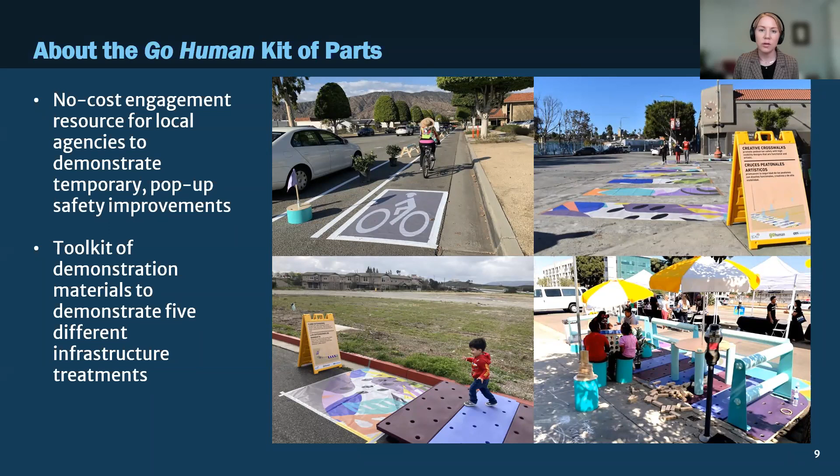Our kit of parts is really interesting because the materials are very lightweight. They're easy to transport and set up, less burdensome than traditional materials can sometimes be, and they're flexible and movable. So if you want to make a change in the field, you can easily move the materials around depending on what the site conditions are.

An important framing to all of our work through the Go Human program is our agency's commitment to racial equity. Our agency adopted a resolution restating our commitment to racial and social equity, and this aligns really closely with our Go Human project.

As you can see on the slides, fatalities and serious injuries are disproportionately occurring in historically disinvested communities, so there's an urgent need to address these issues on the ground. Demonstration projects can help facilitate this work and move forward safety priorities, especially in communities bearing the burden of these disproportionate impacts.

Now I'm excited to share some demonstrations in action. Go Human recently partnered with the City of Long Beach, their Public Works Division, and Council District 9 to demonstrate some improvements as part of their upcoming Great Boulevard project, a permanent project they plan to construct next year. We were excited to partner with this community, and this work was special because we were able to do some hyper local engagement with residents in an underserved community.

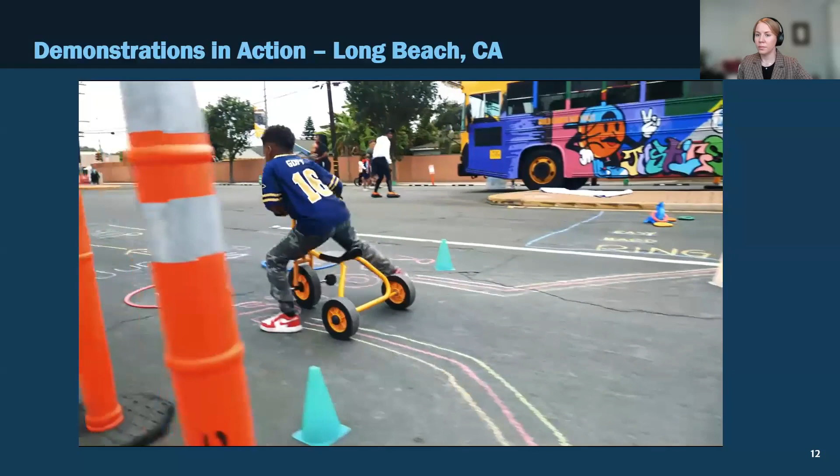We are closing down the street and reimagining Artesia Boulevard, inviting the community to come out, reimagine, and re-engage with the Artesia Boulevard corridor. Today wouldn't be possible without the Southern California Association of Governments' Go Human campaign. It's a demonstration that features safety improvements relative to mobility and livability, making sure our streets are better. Next year, you're going to see a tremendous transformation of this regional corridor. This is an exciting collaboration with the City of Long Beach, and it's about community engagement and community education, whether we're talking about the bike lanes here or the high visibility crosswalk. We want to contribute to safer streets, and that's exactly what the Go Human campaign is about. These improvements make it safer and more enjoyable to walk, bike, and roll in communities across Southern California. Activate Artesia is a great example of Go Human's mission to reduce traffic collisions in Southern California, create safer and healthier communities, and encourage people to walk and bike more.

All right, so that'll give you a little taste of what some of the demonstration projects look like. Again, it's really about celebrating the local community and engaging folks in some of the treatments they could potentially see on their roadways.

Now I want to transition a little bit to talking about some of the projects that were recently implemented as a result of Go Human demonstration projects. We partnered with the city of Palm Desert.

They're a mid-size community in the Coachella Valley where we did a demonstration project a few years ago. As a result of some really positive community feedback, the city then began taking a look at the final designs and some of the configurations of San Pablo, which is really a main thoroughfare within the community.

It has connections to the Coachella Valley Link, or CV Link bikeway, so it's really a main roadway that has residential access to commercial. We were really excited that the city then invested about 18 million dollars in improvements for San Pablo Avenue.

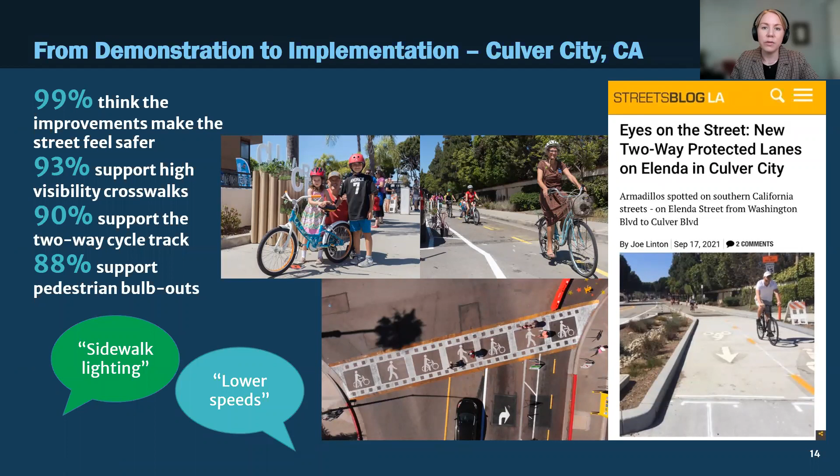We're really excited that this project is anticipated to be fully implemented this month. As you can see, there was some media coverage on it recently. We're excited that it will also include some median refuge islands and new street trees.

I'm also really excited to feature the city of Riverside. We've partnered with the city on a few demonstration projects to really help move the needle on active transportation in Riverside.

We partnered on two demonstration projects in the last few years that received overwhelmingly positive support from the community. We demonstrated treatments such as high visibility crosswalks and increased pedestrian lighting.

As a result of this support, the city actually moved forward with underpass lighting under the 91 freeway, branding it to thank some of the frontline workers during the height of COVID-19. The Go Human demonstrations also inspired other local engagements and activations in the city, as they're working towards their public health and equity goals.

You can also see they implemented some high visibility crosswalks at one of the major intersections in the city.

From these projects and many of the other projects we've worked on through Go Human, there have been many key lessons learned, and I'll share a few of them with you today.

One of the really key lessons learned is to put people at the center of the project. While demonstrations are a great tool for community engagement and a way to celebrate the local community, it's essential for public agencies to be transparent with community members about what the permanent improvements will look like and what the project timelines are. It's also critically important to continue to engage with community members and follow up with them throughout all phases of the project.

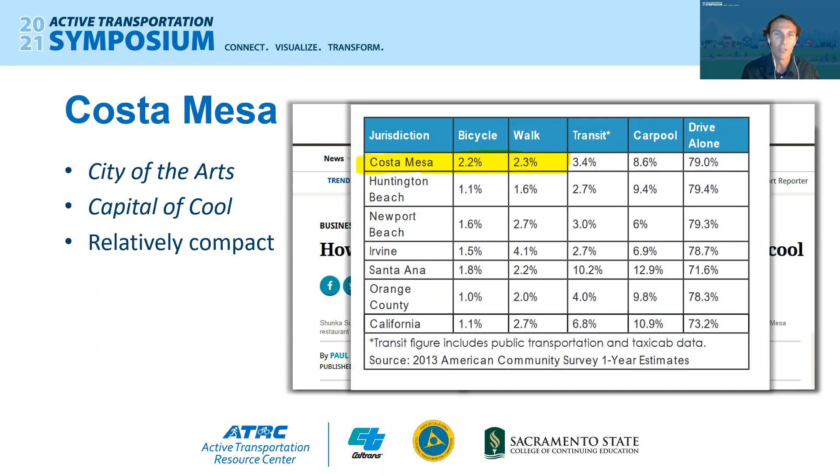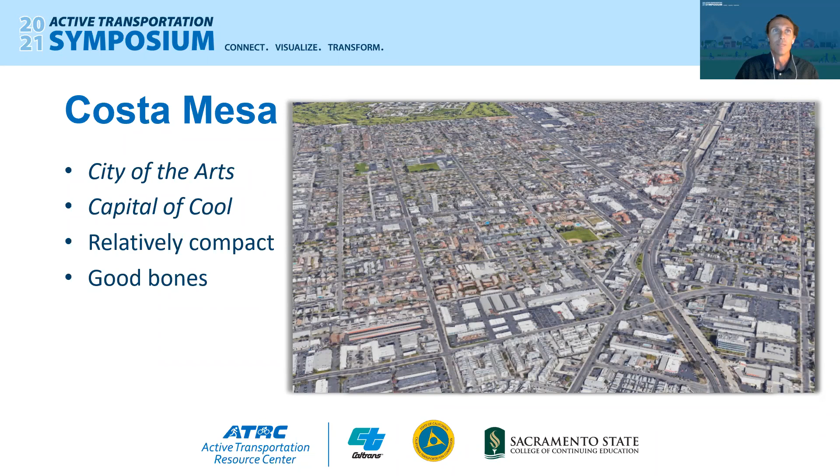CMABS, Costa Mesa Alliance for Better Streets. So we formed in 2019, early 2019, for a few reasons. Our city should be, as I was just saying, an active transportation hub. We do have a good layout, right? A good grid.

Things aren't going to get better on their own. We had recently elected a really good council that a lot of us were excited about, and it took a while for us to realize that wasn't enough. They can't just wave a magic wand and start implementing all their hopes and dreams. So we recognized that we needed to build a base of advocates to both support the good things that some of our leaders wanted to do and to keep raising that bar, to keep that pressure on.

So we had a bikeway and walkability committee that was a few years old at that point, and they're technically a subcommittee of the city council, so they're under the Brown Act, and not a lot was happening. Likewise, we had an active transportation plan, and not a lot was happening or even getting budgeted in terms of implementation. It was really kind of just sitting on the shelf.

So a lot of us attending these meetings decided, well, let's form a group that can stand up to the city, that's separate from the city, but can provide that concentrated focus towards our goals. So we just started doing that. We just started inviting our friends to meetings. We would meet, we'd talk about these things, we'd print out big maps of the city and gather around and figure out where people were having trouble walking or biking, why people wouldn't get from point A to point B, why they would opt to drive instead despite the short distances, things like that.

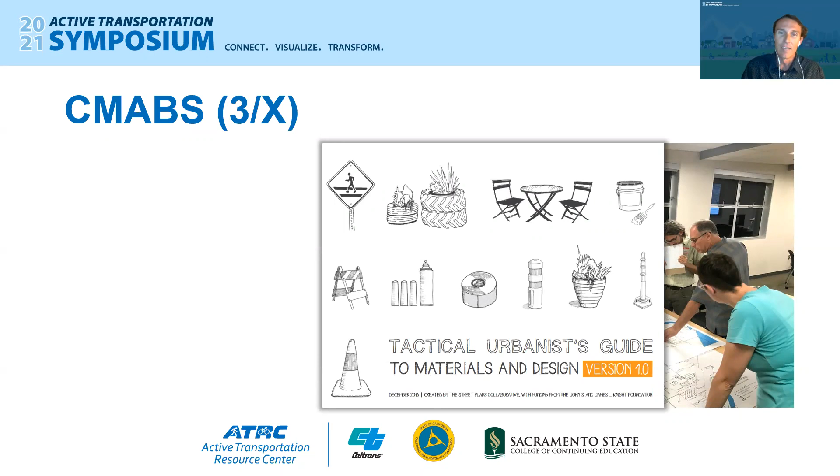So we saw the advertisement for the SCAG mini grant, the Community Streets mini grant, and the description was right up our alley. They were providing the funding for exactly the sort of things we wanted to do, make walking and biking easier for more people in the city. To our surprise and to our horror, we actually won $10,000 to be put to use. And we are not a professional group of people. We're kind of a ragtag group of neighbors that like to walk and bike in our city.

So we met with the city staff, and the first thing to do, we had to settle on a location. We chose West 19th Street. It's a historically disinvested, disadvantaged part of town, but it's a cool corridor. It's mixed use, it's got a lot of shops and restaurants, a lot of multifamily, a lot of people walking around, trying to bike around. The senior center's there, the soup kitchen's there. It's a cool spot that should be better than it is.

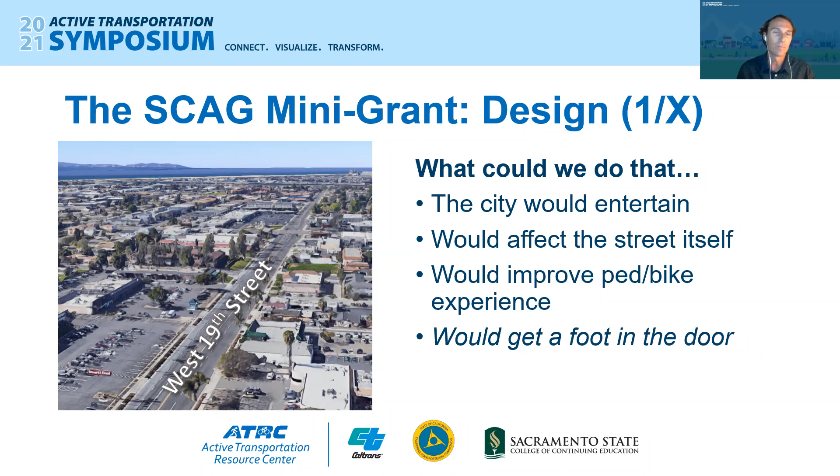This one's in italics because it's important. We wanted to get a foot in the door. We wanted to get the ball rolling in the city. We wanted the city staff and our leaders to start thinking differently about how we go about making our places better, and what the possibilities are. The fact that it can be different, and how we might take steps towards realizing those visions.

So in conversation with the city and settling on specifically what sort of project we would do, we couldn't do bike lanes. You need a study. That's what we hear for a lot of these. You need county approval. You need our neighboring cities' approval. Crosswalk, same thing. You need a study. We couldn't do a lot of these things. It was just too much.

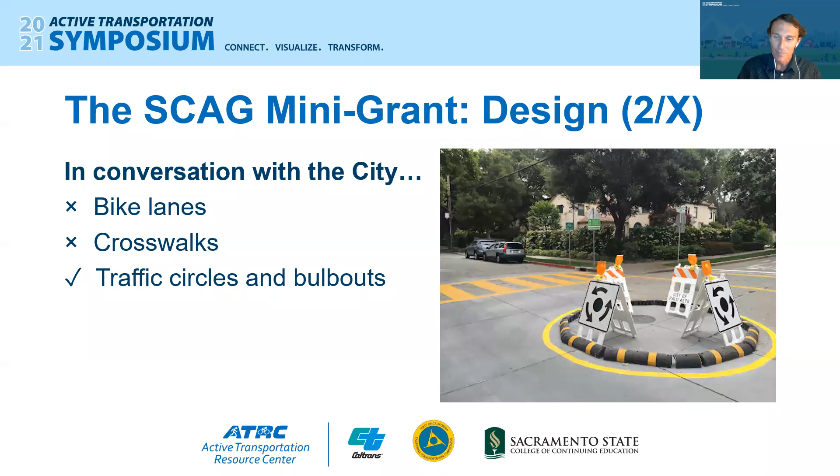Traffic circles and bulb outs, they said we could do that. And that gave me a little cold feet because traffic circles are a little bit controversial, even the Safe Streets community. It's a little split on this, but this is what we were able to do.

So we started doing it. We were in charge of just about everything. We had some key people, city manager and a couple of champions on the council that made sure that this was a community-led project, that our organization, CMABS, was able to take the lead on this, that it wouldn't be kind of top-down, staff-led, but that we were able to do this. And so we were in charge of design, getting all the materials. We were kind of the middlemen between the companies that rent the cones and everything, and the city. Trees, bushes, the artwork, informational signage, data collection, so the survey, but also speed and volume data, collecting all that.

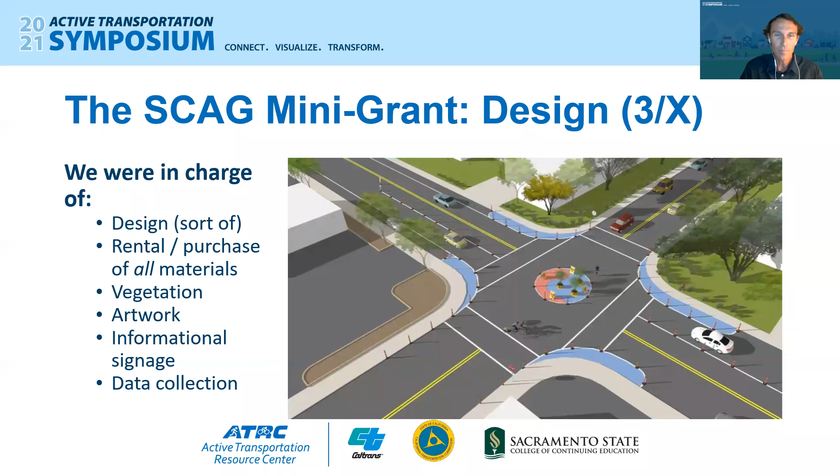These are the renderings we drew. And so here is what we did. This is a 1-minute video.

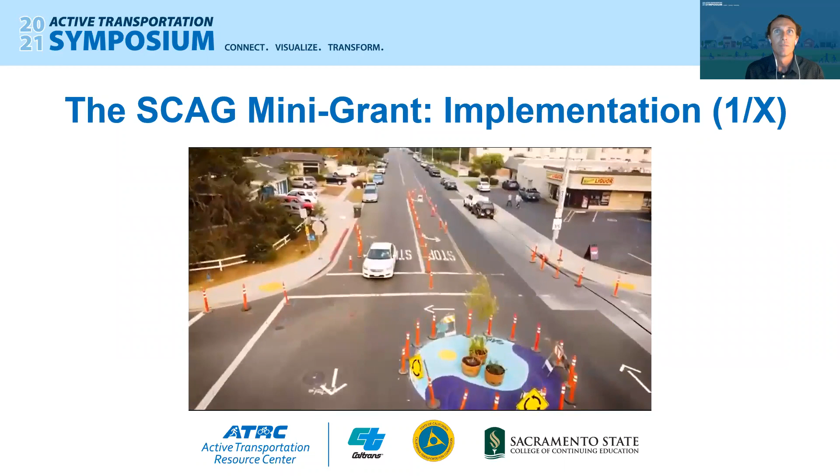Costa Mesa Alliance for Better Streets is a nonprofit that is organized to try to help make Costa Mesa a better place for everyone. So this is a week. It's volunteer labor. It's cheap material used with grant money. We'll learn a lot of things. We're going to be getting a lot of community feedback from this. As an engineer, this approach to design is very natural for me. You don't build it until you know it works, and the only way to know it works is to try it. It's not that complicated. It doesn't have to be expensive and complicated to just calm the streets a little bit, to slow down the cars. Especially on the west side Costa Mesa. Very prideful in our neighborhood. People love their neighbors, and we want to create an environment where we can interact more often.

Okay, so that was it. It was a week-long demonstration project with, as you can see, pop-up traffic circles, some bulb outs. We used delineators. We had a local artist come and do the design that made it real Instagrammable, right? Really fun for people to share on social media and stuff, and for the newspapers. We got some local media coverage, 2 different articles in the Daily Pilot, Above the Fold even.

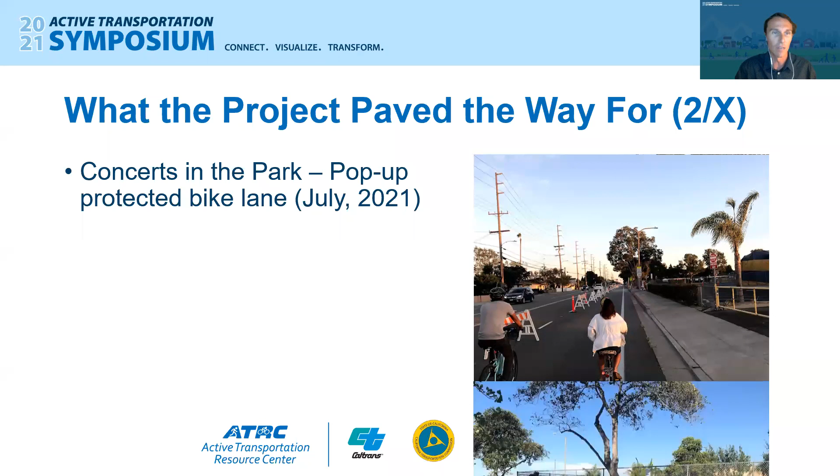Delineators everywhere. These are going up all over the city. Staff explained it to me. They said, well, if it doesn't work, we can remove it. If we need to tweak it, we can tweak it. We're going to use inexpensive materials. And I said, that's a great idea. That's cool. We support you in that.

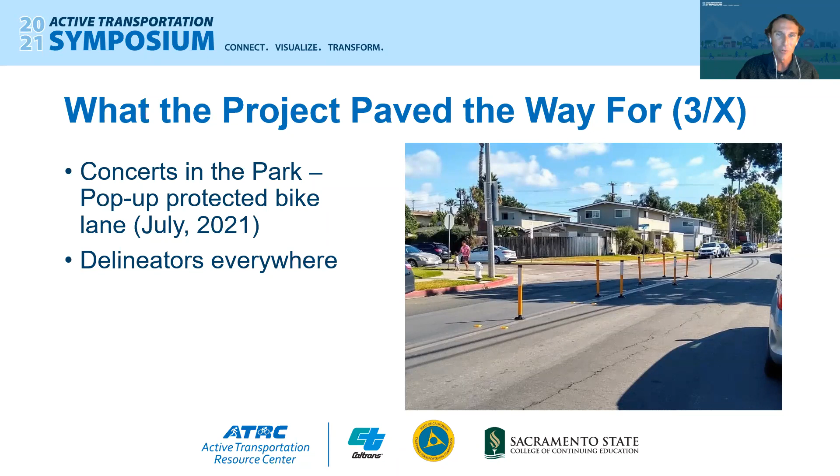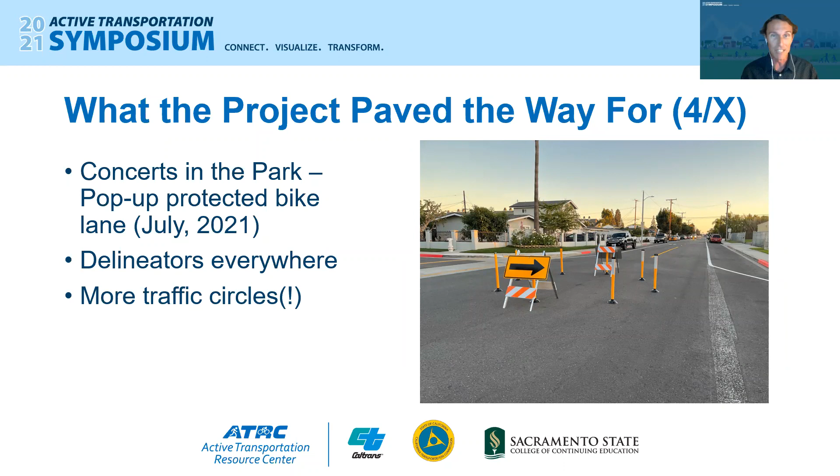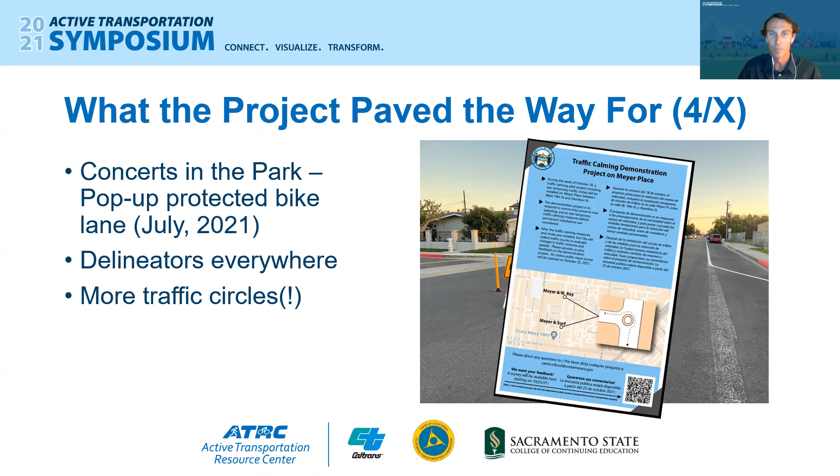So these are getting a lot of good feedback in different parts across the town, and more traffic circles. The city is doing this on their own. Our organization, the Alliance for Better Streets, had nothing to do with this, but the city's doing it and trying to address speeding concerns. They allowed us to help where we can as an organization, and we got to do the community outreach component of this and the other projects I was just talking about.

So maybe this is kind of basic, real fundamental. We all get this, but this is the perspective I'm bringing to the table. Paramount to progress is a healthy and productive relationship with the city. You can maintain a good relationship and keep a fire lit under them. This is absolutely key. I work as a planner in the private sector. I'm a planning commissioner, but progress is made at the community level, boots on the ground, community advocacy, getting people connected, focused, and concentrated on specific efforts like this, and keeping raising the bar with the city while maintaining a good relationship with them at the same time.

Also, demonstration projects are the way for hesitant cities to experiment with active transportation proposals in low-risk ways, and it's the only way to get the community to think outside the box. So we're super excited that SCAG Go Human was able to fund us with that project, and it was a good project overall. Although it was messy, very messy and stressful, we did it. We got through to the other side, and now we're beginning to see the long-term fruit of what that project enabled us to see. So that is my presentation, and I look forward to Q&A after this.

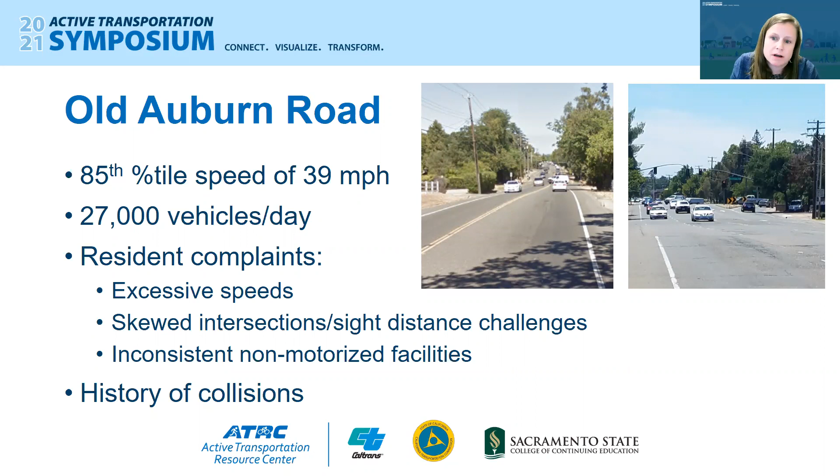Over the most recent 5 years that we had data for at the time, there were 139 reported collisions along the corridor, including several involving bicyclists and pedestrians, 3 of which were fatalities, and 3 resulted in severe injuries. Just over half the crashes were rear end, and over a third were due to unsafe speeds. Typically, rear end collisions are a result of unsafe speed and sight distance limitations. So review of this data confirmed what we had already been hearing from the residents and highlighted some of the main issues for us to concentrate on during our plan analysis.

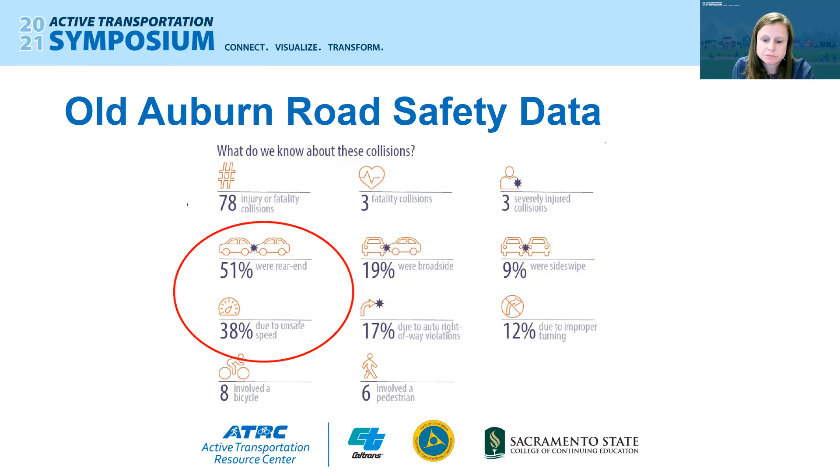However, although the planter boxes did what they were designed to do, minimizing severity of crashes and damage to adjacent private properties, they didn't fix the underlying problem which was causing the off-the-road crashes to begin with.

We applied several times for Highway Safety Improvement Program and Office of Traffic Safety grants to realign the intersection, add a high friction surface treatment, and increase visibility of the traffic signal. However, since those grants are awarded based on severity of crashes, and since all crashes at this intersection were property damage only because of the successful implementation of the planters, we were unsuccessful in multiple attempts to secure grant funds to correct the underlying issue.

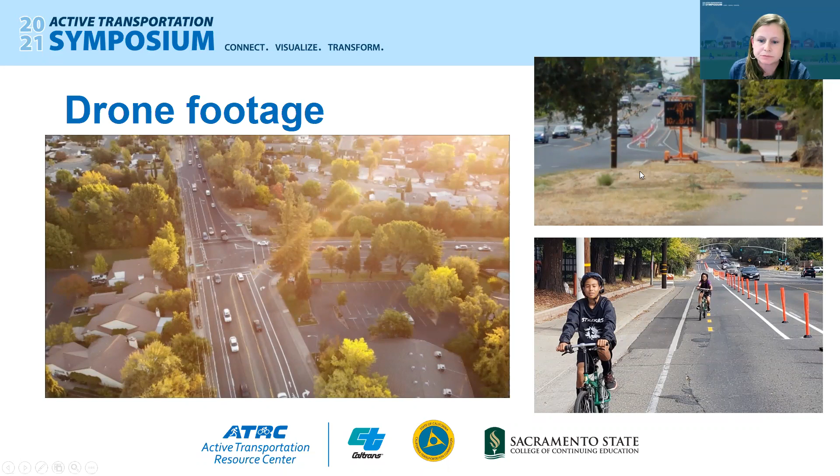To kick off the demonstration project, we also held a community safety fair. This was an in-person event used to further increase engagement, share concept level plans, solicit feedback, answer questions, as well as provide bicycle and pedestrian safety information to the public.

The safety fair had huge local participation from stakeholders and various project partners. The school district brought a fleet of bicycles for kids to ride on the temporary bike path, as well as painted a course within a local parking lot to teach rules of the road to younger participants.

We had SAC Regional Transit, our local transit agency, with information on local routes, as well as a bus to tour promoting their then new on-demand microtransit services.

The city provided free bicycle helmets to kids, and we had representatives from Dignity Health fit the helmets on the kids, as well as provide a free pedestrian safety class.

During the event, we heard from parents that wouldn't normally let their kids ride to school, especially on collector roadways with higher volume and higher speeds, that during the demonstration project, they really felt comfortable doing so. They cited the reason for that comfort as the vertical elements and the separation from traffic.

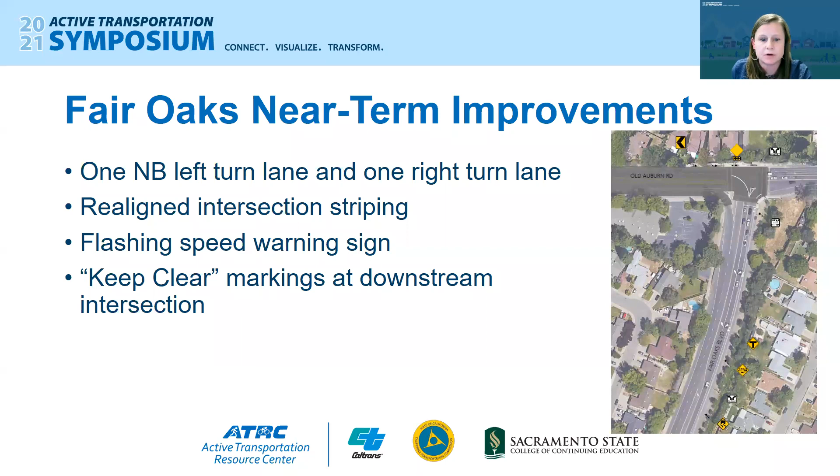I'm happy to report that since we've implemented these changes almost 2 years now, we've not had a single crash into those planter boxes. In fact, even with this record-breaking storm over the weekend, we didn't have anyone run off the road. So I think it's time to change that sign: City 1, Wall 0, and reset the counter.

The preferred road diet concept that came out of the data analysis and concept review was somewhat controversial. Citrus Heights has a large population of residents who are resistant to change, especially when that change is a reduction in vehicle lanes for bicycle and pedestrian improvements. This project allowed us to engage a significantly larger number of people than we'd ever done before.

This gave our elected officials and decision makers more comfort and information when asked to formally decide how to move forward. The high levels of engagement resulted in regional recognition, including an article by our local council of governments, several news reports, and is probably likely why I was asked to speak to you today.

Beyond providing info to our elected officials, it allowed residents and members of the public to see the true impacts. We often heard exaggerated expectations before the demonstration project went in, and during and after, it allowed everyone - staff, public, elected officials - to see what those real impacts would be and to debunk some of those exaggerated thoughts. It also provided an opportunity for staff to collect data, which resulted in adjustments and modifications to the original concept design, and it introduced the public to new types of non-motorized facilities.

Of those 27,000 vehicles that passed through it each day, I would guess that the majority probably had not previously seen a two-way separated bike path or a demonstration project.

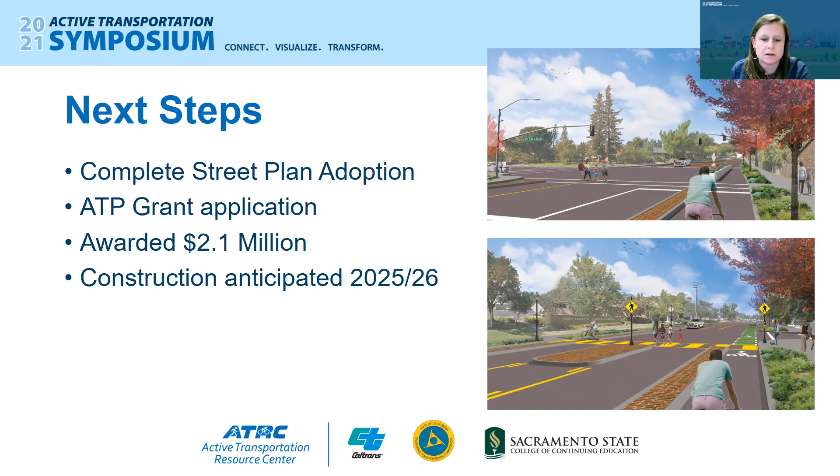As I just mentioned, we received about $2.1 million from Cycle 5 of ATP for the design, environmental, and right-of-way acquisition portion for the first half of the project. We believe one of the reasons we were able to score high enough to secure ATP funds is because of the demonstration project and the significant public engagement. We're just now getting started on this, hoping to start preliminary engineering just after the new year, with construction anticipated to commence in the 25-26 fiscal year.

So just to recap some of the key takeaways we learned during this process: the demonstration project was a great way to engage the public. It increased overall project awareness, both positive and negative, and it allowed our decision makers additional info and comfort when deciding to move forward with this significant change.

And although $25,000 is a lot of money, it is a relatively low cost investment for a future $2 million grant, with hopefully more grant funds to follow. It garnered regional recognition, adding to the already high engagement levels, and it significantly enhanced our ATP grant application, which we believe was the reason it was successful in receiving funding.